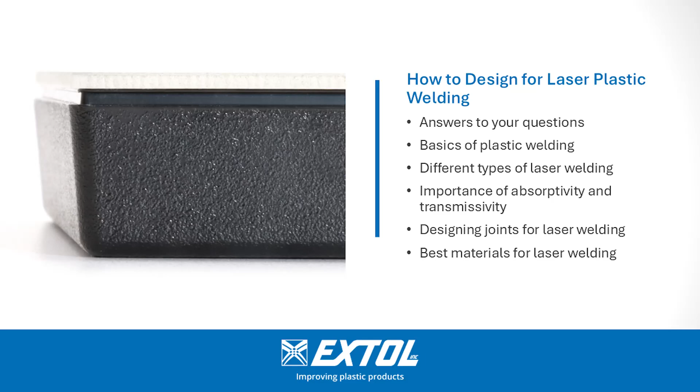Today we're going to talk about how to design for plastic welding, laser plastic welding.

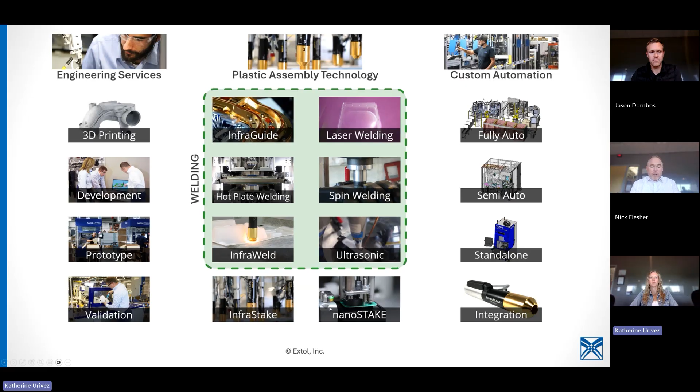InfraGuide's a proprietary technology that we have that is sort of heating both parts at the same time and then pressing them together. Hot plate welding, same kind of concept, but with heat plates that the plastic may touch off. Spin welding, a frictional process. InfraWeld is sort of a through transmission. It's like a spot weld. Ultrasonic, we don't make our own ultrasonic equipment, but we offer a variety of different suppliers in our custom solutions. And then our riveting technologies, InfraStake and NanoStake. Those are proprietary to Extol.

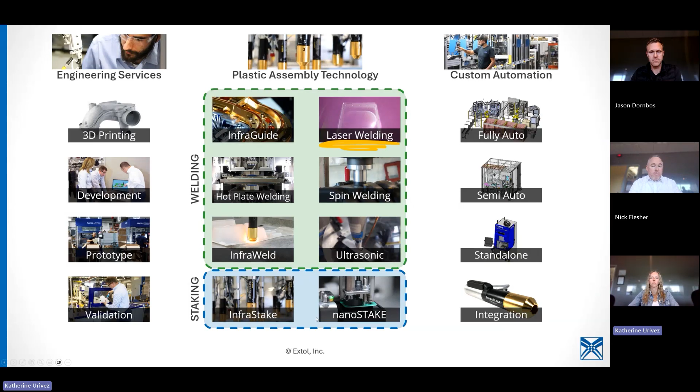Katherine, if you want to talk through... I have a little bit of a delay here. Yeah. Oh, okay. There we go. Great. You want to talk through the laser welding process a little?

Yeah, for sure. It looks like there's even a couple people who have joined the webinar specifically to learn the basics, which is what we're just about to run through. It looks like we've got some other people here who just want to learn the main use cases for laser welding. Great reason to join.

Bill wants to laser weld and seal a container that is also snap fit. Sounds like a very interesting application. I've seen that before. Both and. Yes. Interesting. Both and.

Cool. Well, I guess then here, let's just start at a 1,000-foot view of what laser plastic welding is. So on the far left side of the image, hopefully it's showing up on the left side of your screen because that's where it is on mine, you have two components. You've got that top component that you can see through; it's transmissive to the laser wavelength. And then you've got the lower component.

These two components are clamped together. So there's force applied to the top component that is then transferred into the lower component. The next key piece is heat. Pressure and heat is what makes a good chemical bond. So we've got the laser that comes in and traces the weld profile of your specific part geometry. There is no standard shape that you need your part to fit. The laser path is programmed to your specific application.

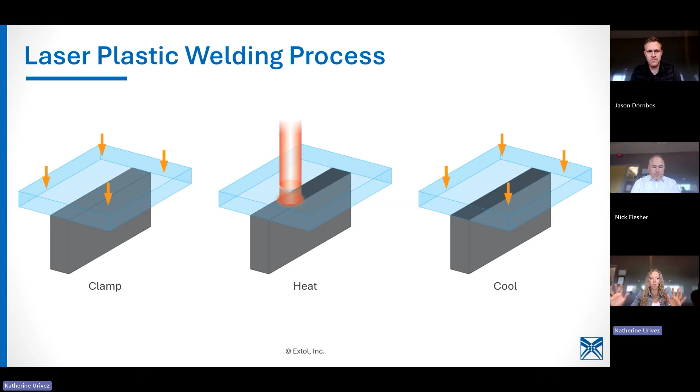Once the laser passes over the part geometry for either a set number of times, a set amount of distance, anything like that, those are some more in-depth parameters that we can discuss. Then the parts are held in a cool phase. You need to cool that molten material down before you can remove the force of the press from the parts, and that's how you get a good, strong chemical bond between the components. So that's laser welding. Fairly simple up until this point.

Key elements for laser welding. Like I mentioned, you need intimate contact between those two components. If the components are not touching each other, you can heat the parts all you want, and you're not going to get a bond. I picture something pretty dramatic, like a potato chip on a flat piece of plastic. If they're not touching, how are you going to expect any welding to occur? So you need intimate contact between the two components. That's where the clamp force comes in.

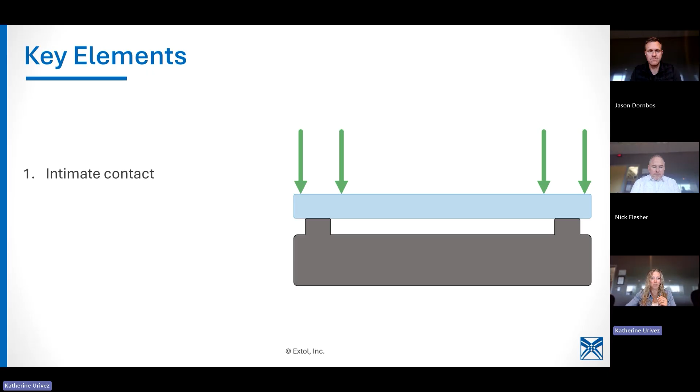Next, this is a pretty cool graphic, so keep your eyes open for this. Here, you want me to run it again so you can make your sound this time? Ready? And...

So what you can see there is that the laser comes... Let me turn on my little laser pointer. I knew I was going to want to use this. So the laser comes in... Oh, I thought I could draw a line here. Is it showing up as a line? It's not. Oh, no, you can't. It doesn't let you draw. Man, it was going to be so much cooler.

But okay, so the laser comes in and it transmits through the top component and then absorbs into the lower component. So you can see this little red bit here is where the laser energy is actually being absorbed. So the transmissive component and the absorptive component are key elements for laser welding. Let me get my laser pointer turned off. And then lastly, you need compatible materials.

This means at a chemical level, the materials, when heated, can bond together and create a strong hermetically sealed joint. You can, and I'm going to put can in quotation marks, emphasize, italics, all that stuff, you can technically combine, I'm not going to say weld, combine dissimilar materials. However, it will not be a strong joint.

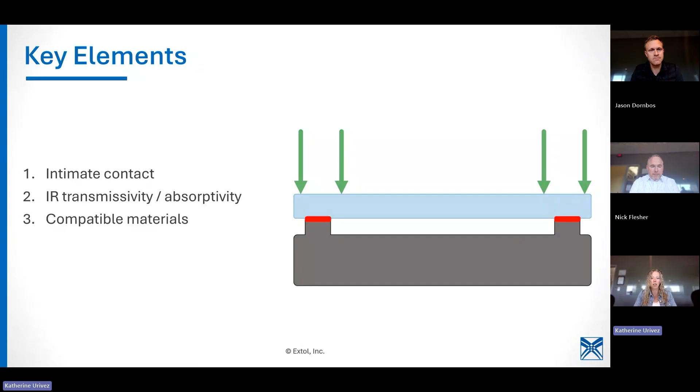So if you've got questions just generally about different resins out there and their compatibility to each other, on the Extol website we've got a material compatibility chart that you can reference. I'm sure Jason can get it sent out as well after the webinar. That's a huge resource that we see people download from our website. So that's free for you to view and then utilize as you need.

One thing I will say about that quickly is the material compatibility chart speaks generally about plastics and their compatibility. We always will recommend testing your specific material resin, because underneath the PC/ABS umbrella there's going to be so many different blends and variations. So we always get the warm fuzzies from being able to try your specific resin, and that's something we can do in-house.

I would also say transmissivity and absorptivity are kind of the same. There might be variations among the resins, but it's always nice to understand the boundaries of how much transmissivity at the specific wavelength. We'll talk wavelengths in just a moment. But anytime we can test samples, sort of complimentary, if it doesn't require tooling, we advise customers to do so.

Yeah, and a lot of resin suppliers will be able to send just material chips, and that's really all we need. It just gives us the quick yes, we can pass through the top layer, the bottom layer can absorb, and so then it gives everyone the confidence moving forward into molding those materials and the laser welding process in general. And it can inform cycle time. Yeah, because that's always a key parameter.

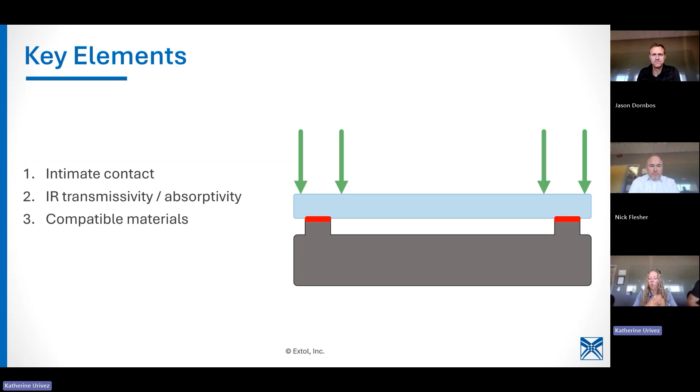I'm curious if anyone has used this material testing offering that Extol has in our applications lab. Has anyone maybe sent in a unique material and gotten us to weld samples up? I'd be curious to know if we've got repeat names and companies' projects coming into this webinar today or not, or we welcome your materials and projects that you've got coming to us in the future.

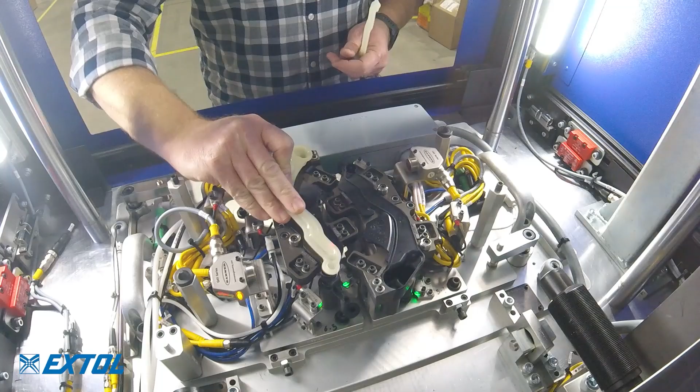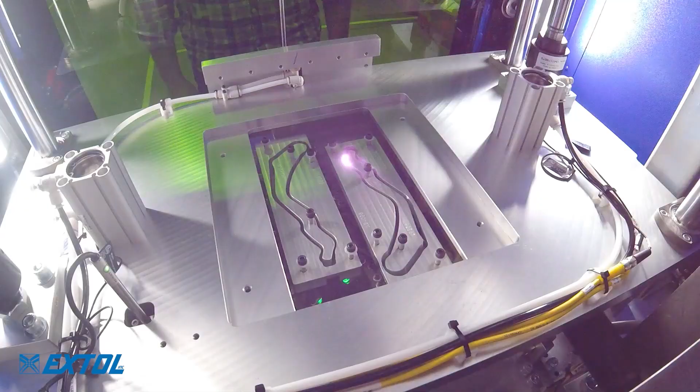So here are a couple example videos. I'm going to play this one on the left here first. You can see this is a 2-cavity nest, and the upper component was placed on the lower. As you can tell, this material is kind of a ghostly hue. It is still transmissive to the laser. This purple dot dancing around the screen is the laser tracing the path of the part. It is doing multiple fast passes to uniformly heat the material and get a uniform collapse of the two components on top of each other.

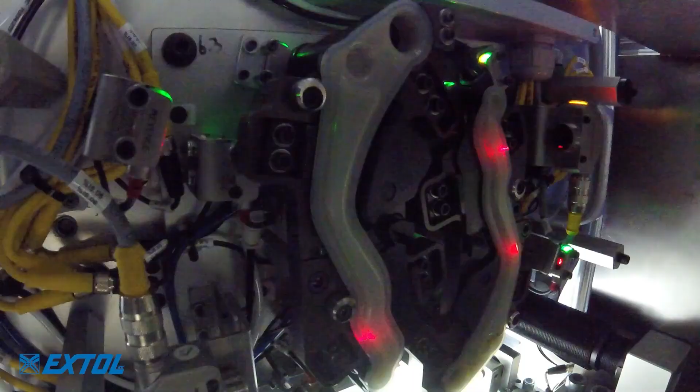I should point out, it looks like it's jumping around, but that's really just because the frame rate of the camera is not able to capture how quickly that laser beam is actually moving. Yeah, what do we do for this process? It was maybe moving 2,000 millimeters a second? Yeah, we go anywhere from, in some cases, 500 millimeters per second, that's pretty slow, up to 5,000 millimeters per second. We usually start around 2,500.

I see a question: can both materials be the same or similar? Does the laser transmit through the top and focus on the joint? That's exactly right, Wes. In the video you just saw, one was natural, that was nylon. I think that particular example was unfilled. We can do filled, but the thickness, we'll talk more about in the design portion in a moment. Both of those were a nylon, I think a PA6 in that case. Correct, yep.

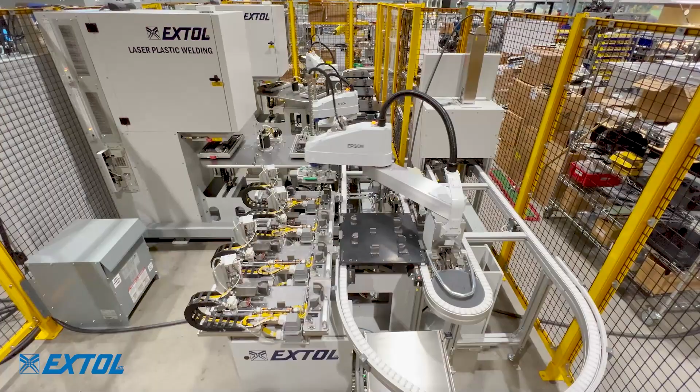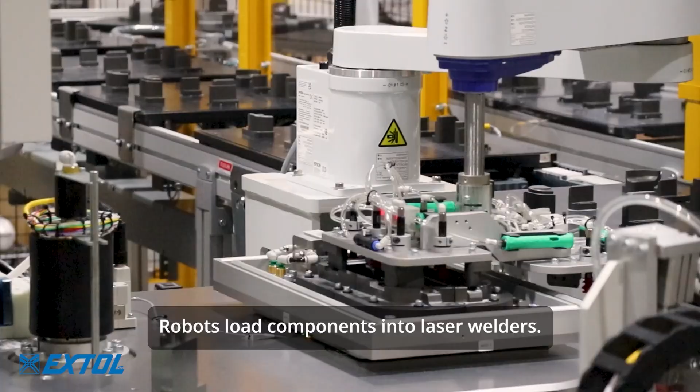Here is a more automated laser welding cell that we did. What you're seeing here is 2 laser welders, and the robots are loading the laser welders as well as loading leak testers. They're loading parts that aren't there. Yes, imagining parts. Maybe we're protecting some customer part data in this video, but you're going to see the dial turn into the laser welder.

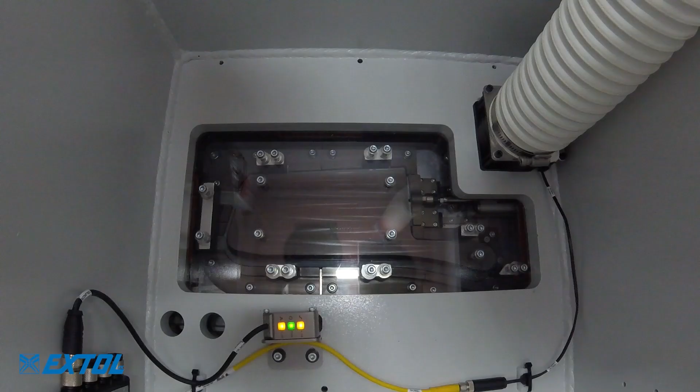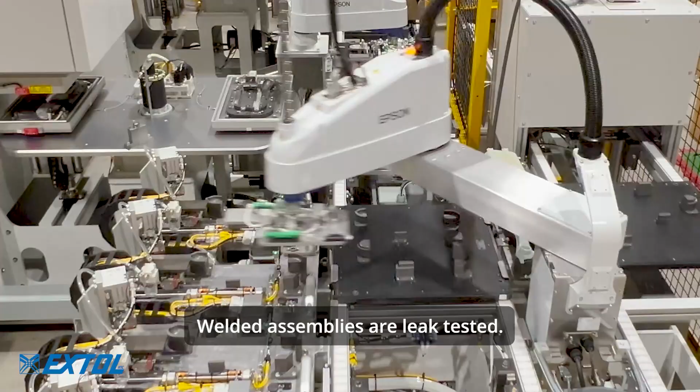The unique thing here that I want you to notice is we've got 2 laser sources on this part. The last one had 1 laser source that was going around both parts. This has 2 laser sources simultaneously tracing the part. Why would we do that? That is a fantastic question, Nick. I know someone was thinking that in the chat as well. There's a couple reasons. I'll go for the big ones. The reason for this application was cycle time.

We prototyped this part, feasible and everything, with a 1-source laser, but the cycle time was in the 30-40 seconds. Oh, no, it was 14. No, for the prototype. Oh, yes, that's right. For the prototype it was about 40 seconds. Oh, you spoiled mine. And we cut it. And everyone was so happy about it too. But the point being, when you add the second laser source, although it was feasible with 1, the cycle time went down to 14 seconds, from 40 to 14.

And I'm kind of prematurely stealing Nick's thunder for a later slide, but this goes to the point that our goal is to help you configure the equipment so it fits your application. We may be able to do it with 1, but to hit that cycle time, we would have had to have how many laser welders in this system? Or you put 2 sources in 1 laser welder, and then it goes faster.

So we've got a question. Do you need an energy director in your part, or can it just be flat? Excellent question. It can just be flat. We do like to see a sacrificial rib. We'll talk depths here in just a moment, but a flat to flat is no problem. That said, it's not uncommon, I would say like 10 to 20% of the time, customers have designed for ultrasonic, and maybe they're damaging some components, or maybe they have some

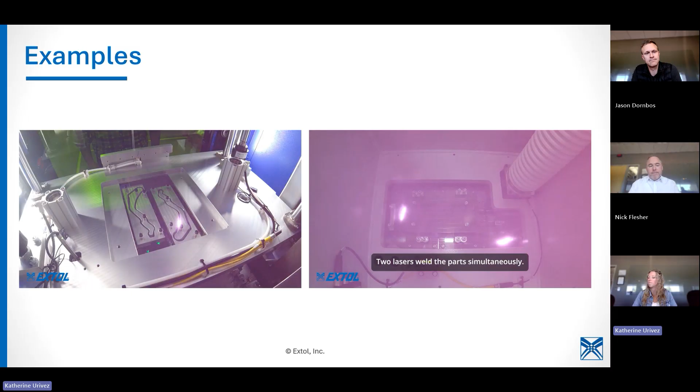Listen, Jason, I know you've been itching to present this slide, so I'll give you the floor, for one reason: people at Extol are scared of this slide. You're calling me out right now.

So this is the electromagnetic spectrum. This is not something that we created. This is laws of physics kind of thing. It's science, Jason. It's science. The electromagnetic spectrum accounts for the visible wavelengths that we see when we see color. Those are different wavelengths that our eyes are perceiving. On one end, as wavelengths get shorter and shorter, we're in the gamma rays and X-rays and the harmful UV, the ultraviolet rays from the sun that can cause a skin tan, but can also give you a sunburn or cancer.

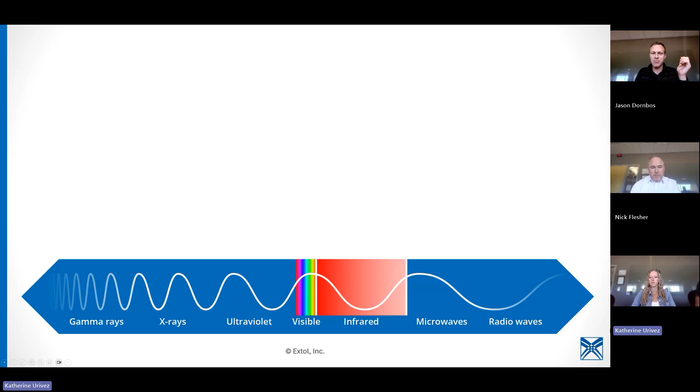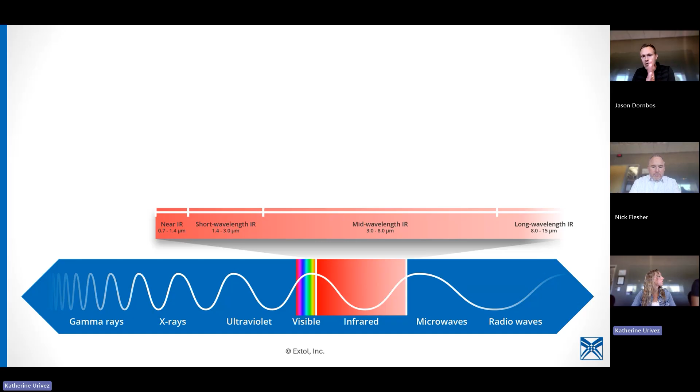Then you go to infrared. The human eye can't perceive infrared wavelengths, and it also has these heating properties. As you zoom in on the infrared portion of the spectrum, we have what we call near IR on the left, and as wavelengths get longer and longer, we get long wavelength IR. We show this because plastic responds to different wavelengths of IR energy. And so we'll talk about 1 micron and 2 micron. Really, most lasers aren't exactly 1 micron.

The near IR wavelength that we use is actually 980? Yeah, 980 nanometers. And you can see on the screen there's a couple other wavelengths right around 1 micron, but we're using 980 on ours. And then over on the right-hand side, in the short wavelength IR, is 2,000 nanometers. Do we actually use 2,000? I think it's 1940. 1940 is what we use.

And if you're familiar with Extol's InfraStake product or our InfraGuide product, that is using a bulb, and that's more like IR welding. That emits a spectrum of IR wavelengths, whereas laser uses a very specific wavelength. The laser source is generating 980 nanometers, that's it.

And so when a laser turns on, we can't see it. The camera can see it in some of those videos because the camera is picking up some of the IR light, but our human eyes can't see it when you see it in person. So I like to nerd on this slide.

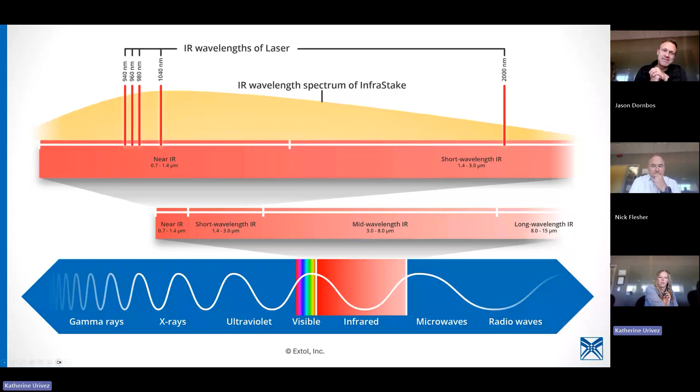It's my favorite slide. Yeah, thank you for being a nerd for us all today, Jason. Much appreciated. David has a question.

What is the max thickness the upper material can have without impacting the weld transmissibility, using, as an example, polypropylene? That's a great question. Nick? I knew you were going to look my way. The answer, my favorite answer, is it depends. You asked about polypropylene, David. I'll use a little more aggressive of an example. A glass filled, like a 30% glass filled PA 66, 2.5 millimeters is going to be about the limit.

Polypropylene, what's the colorant? Jason kind of talked about the IR spectrum a little bit. 1 micron cares about the absorptive properties of the plastic, and so it's this combination of how much power do you need into the weld, what's the weld rib thickness? Think in terms of pressure, except with the energy. If it's a very small beam spot, and we can adjust that because the weld rib is small, then it can actually penetrate just a little bit deeper. And how much absorptive material is in the lower.

And so at Extol, we evaluate, all right, well, what's the weld rib look like? What's the transmissive properties? And what's the absorptive properties? In the automotive lighting or in the commercial lighting space, we see a lot of acrylic, PMMA, and those can actually transmit many millimeters, even inches, if you capture the light correctly. And so then the problem shifts from transmissive properties to, can I get the energy where it needs to be? And quasi-simultaneous, we'll talk into that a little bit more.

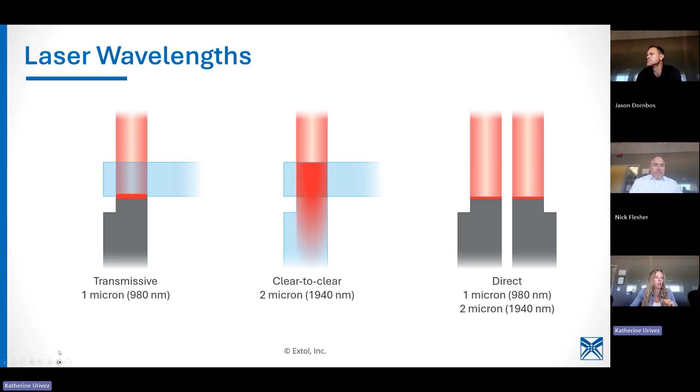So up until this point, Extol, the laser welding approach that we use, is called quasi-simultaneous. So what this means is that the laser traces multiple fast passes around the part geometry. This allows for the parts to be evenly heated and evenly collapse into each other. We find that this is the most robust welding process because, like I just said, you're evenly heating the part. You're not introducing part stresses by heating all the way on this side of the part and then smashing the other end of the part into itself later on.

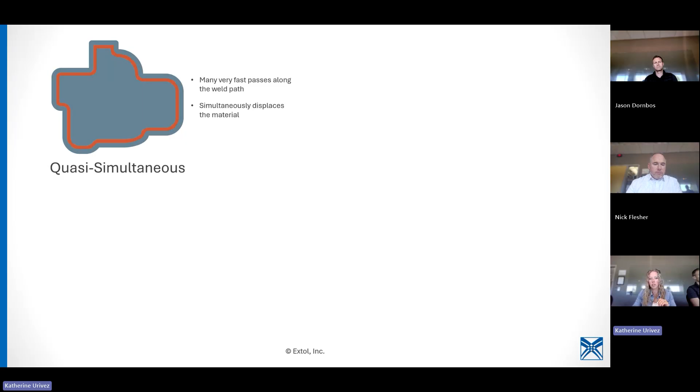So that's quasi-simultaneous. And then there's also contour welding. This is also very common in laser welding. It is one slow, continuous path along the laser profile. So this is typically used for some larger applications. Quasi-simultaneous is mostly utilized when parts are less than 16 inches by 16 inches. That's kind of the limitation window for quasi-simultaneous.

You can stack multiple sources on top of each other to open up that window a bit more. But generally, I'd say if parts are smaller than 16 by 16, we go quasi-simultaneous. Contours for something larger. Yeah, and as Katherine stated, we have used multiple lasers and scanners for quasi-simultaneous on larger parts, but I would say well over 90% is sort of within that 16 by 16 inch window.

Looks like we got a question about enclosure requirements, but Nick, it looks like maybe you typed a message here in the chat. Yeah, just generally speaking, there is a safety component to laser, and we've seen applications where people haven't taken the proper precautions for that. It was a great question. The most straightforward way is to have a light tight box. Things need to be light tight, and so you really need to have a certified laser safety officer evaluate that. We have a couple on staff.

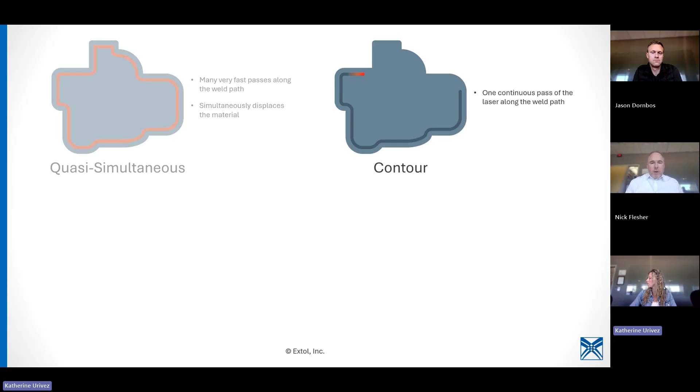Another common type of laser welding is masking. This can be done, I'd say, typically with quasi-simultaneous, where if the beam spot cannot be small enough due to very tight part geometry, a mask is introduced to limit the beam spot size. So this would be ultra precise. We're talking less than 0.7 millimeters for your weld rib width or your beam spot size. Not overly common, but an option.

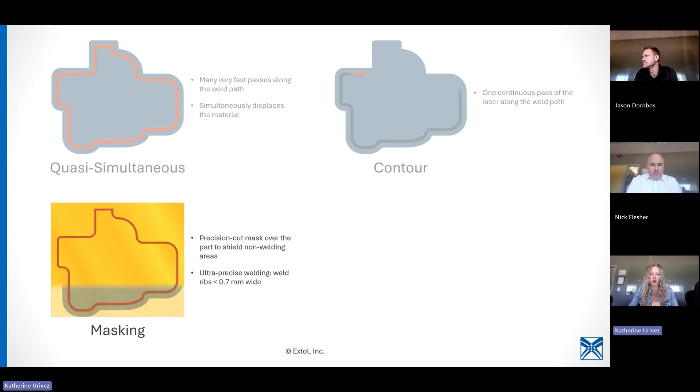And then lastly, simultaneous. This is another big one in the laser welding world. What this is, is individual fiber optics placed all the way around your part geometry that, rather than one beam spot turning on and tracing the part, are simultaneously blasting the part with laser.

So this is super fast, typically used with some large, complex paths, a lot of intricate curvature. Maybe think of an automotive headlamp or tail lamp, something that's got a lot of geometry in every direction to it. Simultaneous is often used for that type of industry.

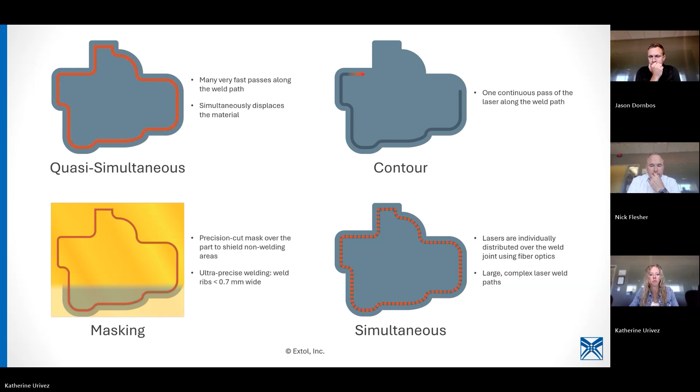What's a typical laser weld width? I would say it's application specific. In the medical space, microfluidics sounds very specific, but it's actually a broad category. We may see beams in the 0.7 to 1 millimeter range, 30 thou-ish, all the way up to, I would say, 3 millimeters. And it all depends on strength. What's your application? Does it need to be ultra strong, or do you want it super aesthetically pleasing?

Look at the slide we're on. We'll talk about that in a second.

We've done up to a 1/4 inch wide because the application warranted it. It needed a very strong weld. That weld took a while. Just think in terms of how much energy you have every time you double the radius of the beam spot; it's a little round beam spot. So it's a balance of how much wattage do I have, what cycle time do I have, what strength do you need, what aesthetics do you need? That's kind of that question.

How does beam angle from a galvo scanner affect a weld and joint design? That is a deep question. I love it. I'm here for it.

We typically use what's called an F theta lens on the galvo, and the F theta lens essentially moves that beam spot from a small, I think it's 50 millimeter aperture, outboard to whatever F theta we choose. The wider out you get, if you think of a flashlight projected on an angle, you can get a little bit of an oval on that laser beam spot. But we typically accommodate for that in power and in the focus that we dial in.

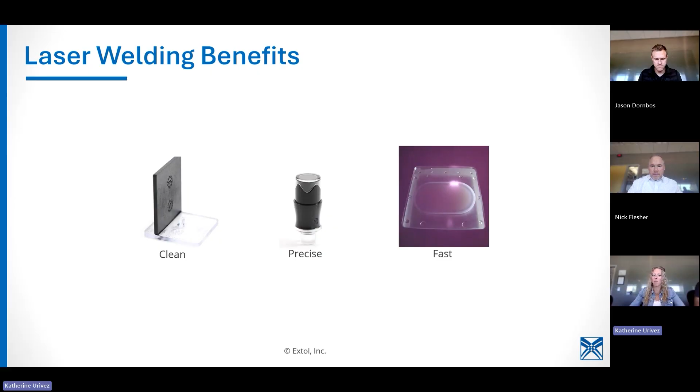And I'm so happy to be getting off this slide because, man, that little purple circle was making me dizzy.

I was just about to say, that kind of speaks to what Gary had asked about earlier around how do you know if it's ultrasonic or if it's laser? It's typically cleanliness. That's probably the most common thing we see. Ultrasonic does a pretty good job, but there are times when you can't chance any dust whatsoever. Precision is probably next. That energy goes nowhere else except for where you want it to go. If you've done ultrasonic welding before, it can kind of run away from you in certain applications. And so those are the two biggest indicators.

Speed-wise, you're probably not going to actually beat ultrasonics for speed, but it's pretty darn close. That really small device that Katherine showed, I think that laser energy on time was 1 second, and the depth was 0.2 millimeters. It's a more expensive technology than ultrasonic, but when you need it for those two reasons, you need it.

Strength of ultrasonics to laser generally? I would say comparable. Okay. It depends on fillers and all those kinds of things, but we typically say design for 70 to 90% parent material strength. Nick, do you want to talk a bit more about the design?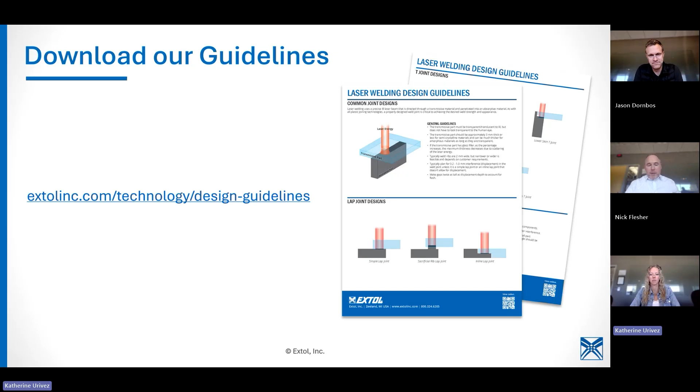So some of the slides you're going to see are in that guideline. It's general. We're trying to hit this broad, all industries, as many applications as we can. But that's kind of what we're going to get into right now. We've talked about some of these things already, just answering questions, so I'll try to breeze through some of them.

The transmissive part has got to be transparent or translucent to IR, but it doesn't have to look like it. We've got multiple applications out there where it looks opaque to the human eye. We've got an inspection system, so we can check that out. That transmissive part, we've shown some examples, natural. You might be saying to yourself, well, I can't have a white looking part on a black part. It doesn't have to be that way.

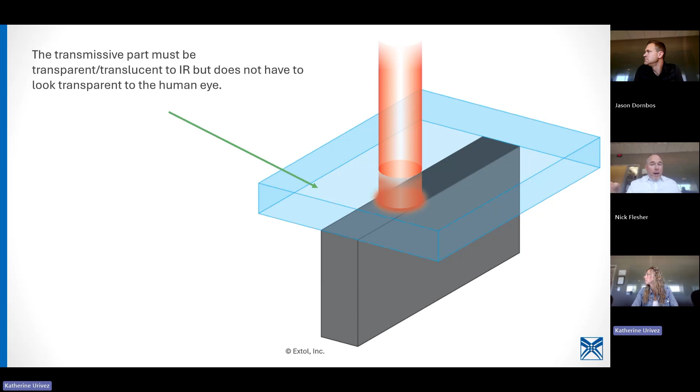The most common example that we sort of give, and we didn't provide these systems, but most everyone is familiar with Apple's AirPods. Those are laser plastic welding. White on white is kind of the most challenging application because they can discolor, but that's just an example of challenging your norm of, well, it has to be clear to black, not necessarily.

A transmissive part, semi-crystalline, we just roughly say 3 millimeters thick or less. I talked about fillers. If you're using talc or if you're using glass, we really suggest 3 millimeters or less if you can, especially if you need a strong part. Everybody's needs are different. We've had a couple strength questions. We see folks that say, I don't care about strength. It's a stitch weld. I just need it to stay together until it gets assembled into a larger piece. And other customers say, it's got to be 100% hermetically sealed, crazy leak check requirements. We'll help you design for that.

Amorphous plastics, and if you're not sure what those are, I encourage you to go out there and check it out online. We're not going to state which is amorphous and semi-crystalline

unless I quiz Katherine right now, and that would be unkind of me. I would as well. It's ingrained deep in my soul that the pressure of needing to answer on the spot could make me vomit. I couldn't.

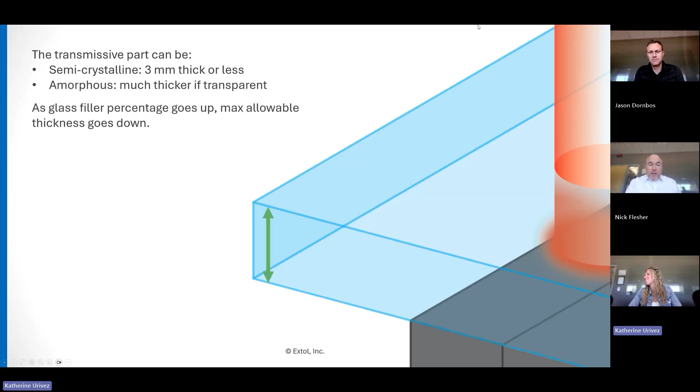Much thicker if it's transparent, right? Amorphous plastics just transmit and absorb a little bit better. Looks like we've only got 5 minutes, so we'll try to move along here. That glass filler sort of affects that quite a bit. We mentioned typically 2 millimeters wide. We see smaller. We definitely see wider. Plan for some interference. As I mentioned, 0.2 millimeters is kind of the minimum. We've done 1.5 millimeters, and I would say this is not the norm, but just to give you an idea of range, that's typical. This technology is a bit different. You're not going to do like a vibration weld joint, if you're familiar with vibration, and displace 7 millimeters of plastic. It's not going to do that. So just keep that in mind as a general guideline.

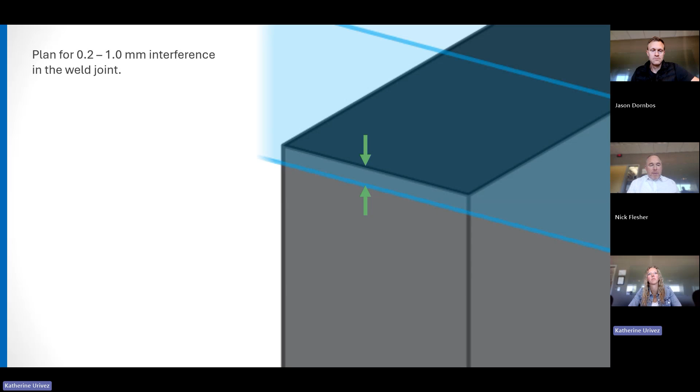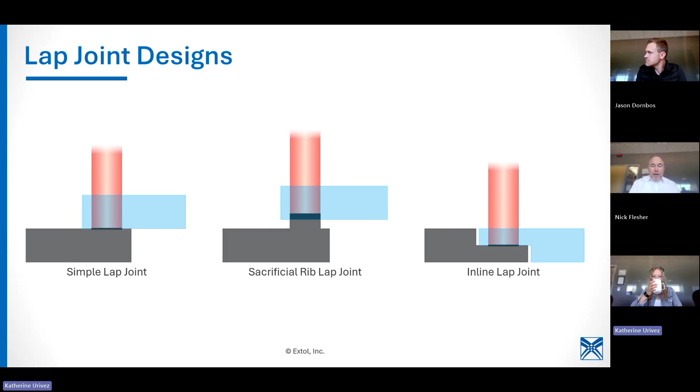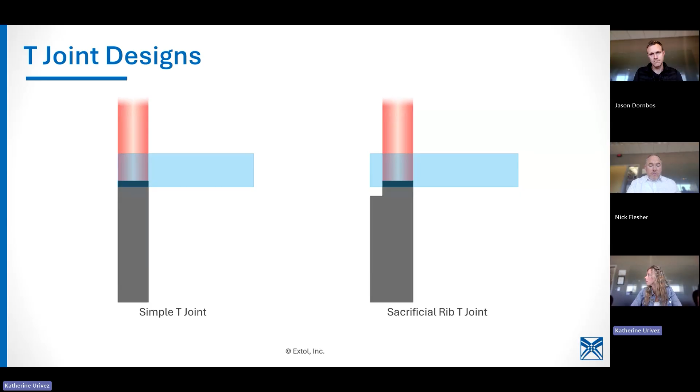We're just going to show some examples of joints. These are lap joints: simple lap joint, sacrificial rib can actually be a little bit of a conceal of your flash. Inline lap joints can give you a really clean aesthetic look. T-joints, you've got some parts that are parallel to one another. A simple T-joint is not fancy, but no technology is flash free. You're going to have some amount of flash, but as you saw from those images, it can be almost imperceivable to someone who is not familiar. Sacrificial weld rib, this provides a really clean joint. You're going to have more flash in the absorptive material typically because that's where the energy is going first, then it's conducting to the upper. So usually we see more flash on the absorptive material.

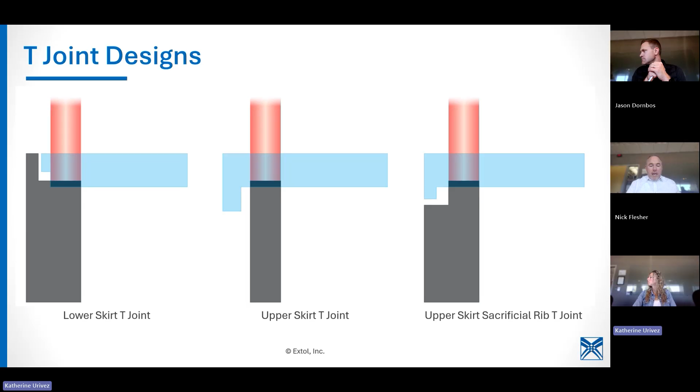Lower skirt T-joint, this we see quite often for highly aesthetic applications. I'm thinking in terms of lighting applications, we'll see that. Upper skirt T-joint, that's for when you need to locate a lid or high automation. Like if you're running 7 figures of parts, like millions of parts, that's something to think about.

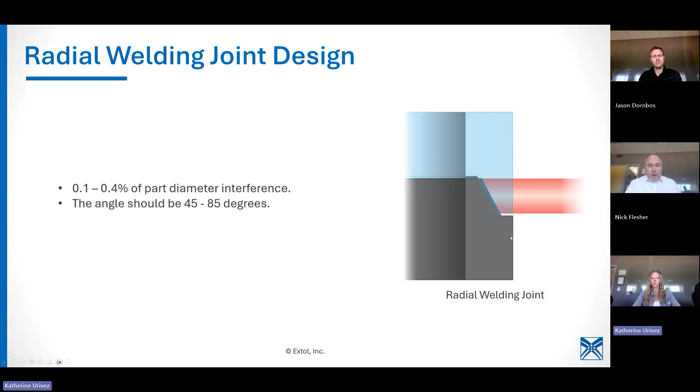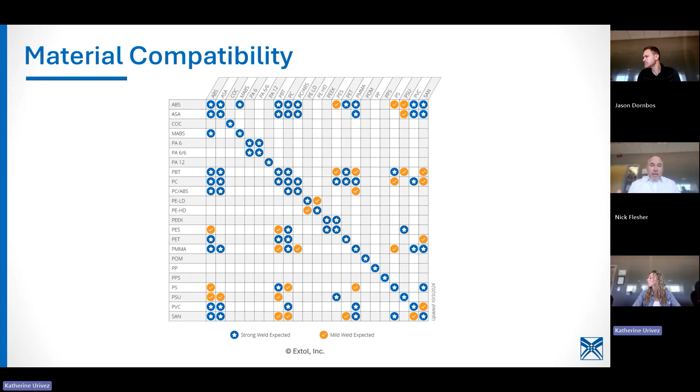This is a material compatibility chart that we mentioned earlier that Katherine said you can download from our website. We also have some other really great resources on all welding technologies and where they might fit as a rough guideline. We can go deeper, of course. Material types, we can help you out with this as well. You've got to have compatible materials like we talked about. They don't have to be the same as we highlighted, but they have to be compatible.

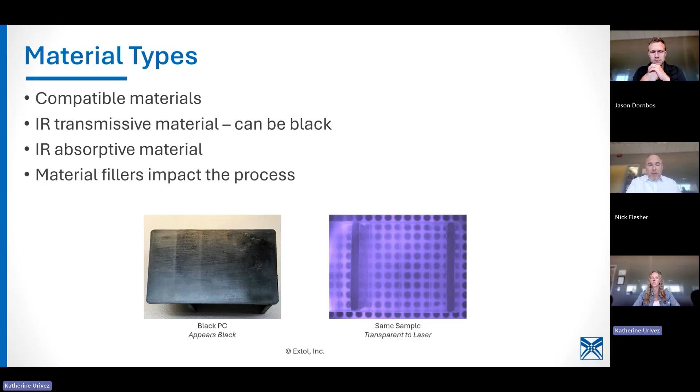That transmissive and absorptive material, I think we've definitely pushed that. And then this is kind of an example of what I was talking about. That part on the left is the same part on the right. It's in our inspection system. You can see the rib. You can see a little bit of a flash around the whole thing, but that's the same part. And so you can get aesthetically a part that you would never know is transmissive to the spectrum of 1 micron. And we've talked about fillers quite a bit as well.

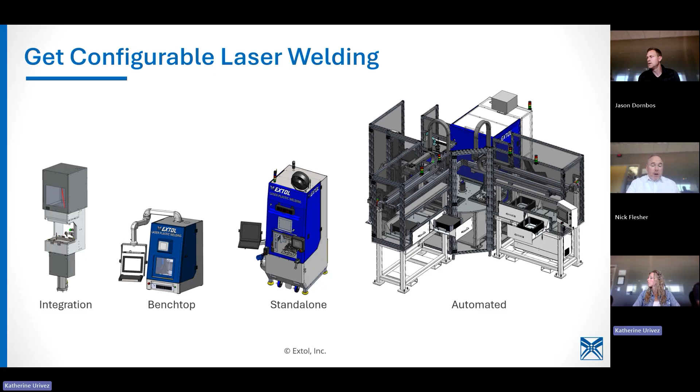This actually is a custom one, but we have inventory laser welders that are standard products for us. And then all the way up into the automated systems where we've got a standalone. That was a custom standalone, but this was a semi-automated, I would actually call it, where it had drawer slides and someone was inserting the parts. So those are just kind of the examples of the equipment that we use for that.